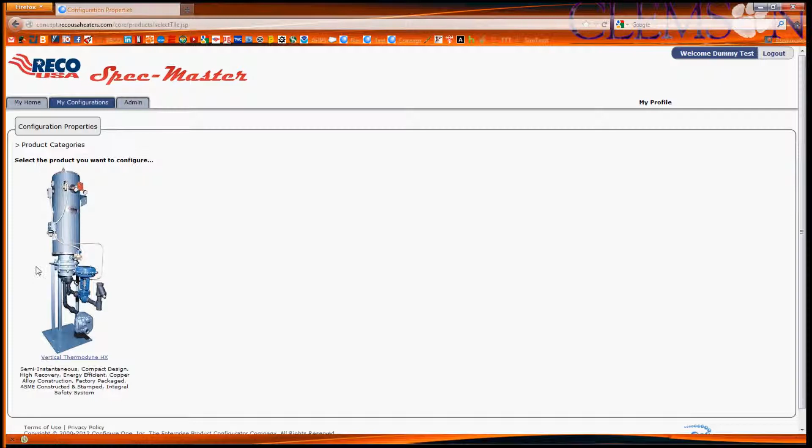Anyway, you'll click whatever product you want to configure, give it a job name. I just did demonstration test, so we'll just call this demonstration. Click continue, and you'll come to the first page. This is our terms of use page.

To protect ourselves, we've got this to where you have to agree each time, and if you need to see the full text terms of use, you can click this button here. It'll pop up in another window, and of course you can read through this. Anyway, agree and continue, and this page is where you'll begin to put your constraints in and start the design of your new unit.

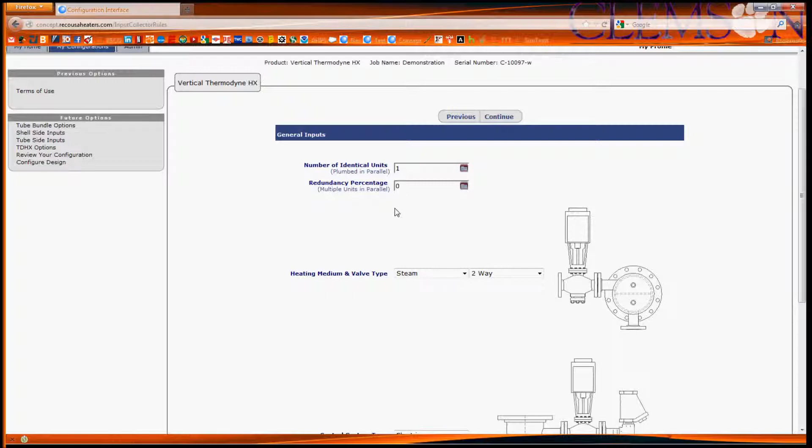So for the HX, we sometimes build multiple units for people depending on demand and how they're set up, but anyway, I'm sure y'all know that. You can do multiple units here, 1, 2, 3, 7, and then your percentage of redundancy here, and that'll be used in the calculation and then the sizing of your units.

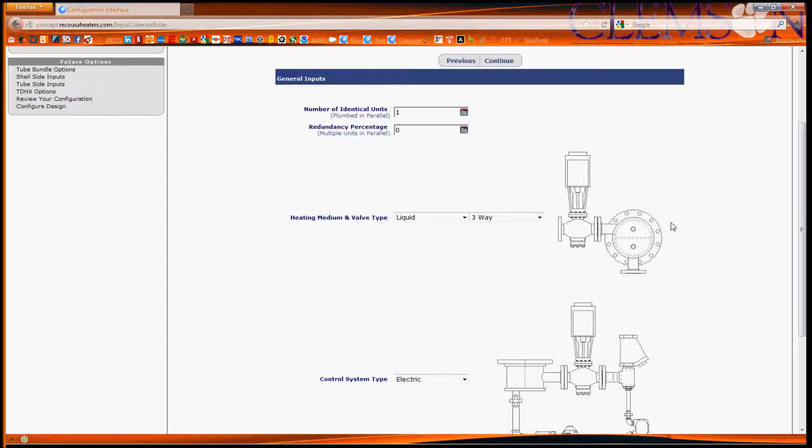Here you've got steam or liquid as far as your heating medium, 2 or 3 way. We've set this up to where you pretty much can't go wrong. For steam, you're only allowed to have 2 way. For liquid, you have 2 options, 2 and 3 way, as well as a picture change to the right, where when 3 way is selected, you get a 3 way picture. So we'll go back to steam, it'll automatically go back to 2 way.

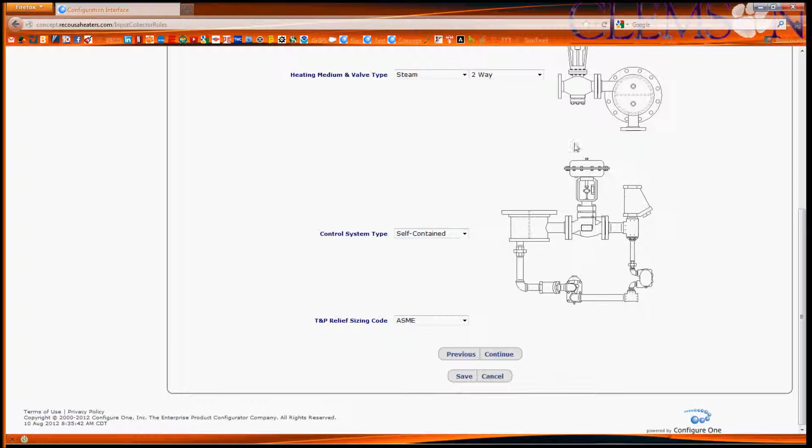For your control system type, you can select electric, pneumatic, self-contained, or none. If you do not want us to supply that, you can of course select none. And again, the picture change you'll see on the right here, for pneumatic, for self-contained, back to electric. Here you can select what relief sizing code you prefer, pretty straightforward. So we'll continue here.

This is the page you'll set up your tube bundle, single or double wall. Again, we have automatic changes here that kind of picks things for you, whereas single wall you have choices, for double wall you do not. And we do this throughout the program to drive you to select the right thing, or to disallow you from selecting the wrong thing.

I'm going to leave this as is. Again, 2-pass is the only option you have for steam, of course, since we selected steam earlier. If you select liquid, you'll have 2, 4, and 6-pass options there. So we'll continue.

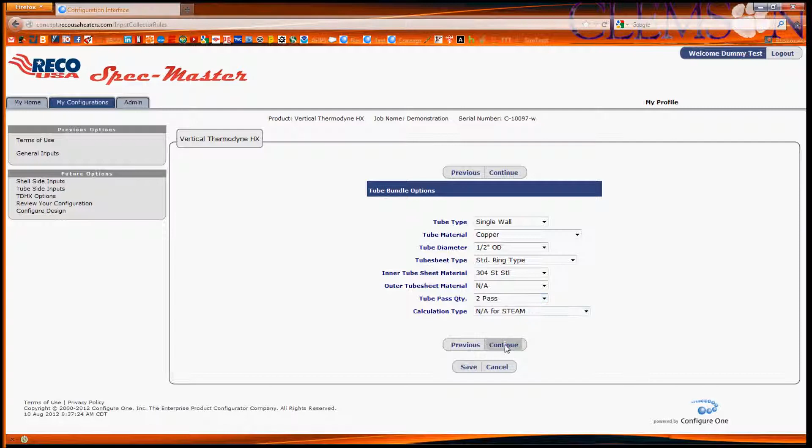This is where you'll start the nitty-gritty constraints for your unit. So we'll say 50 GPM. For these, whenever selections pop up at the bottom here, you'll either have to click to accept it, or you can just hit enter and it'll also select it and keep it.

If you don't do that, it'll drop it out and the page won't let you continue. So we'll leave it 40 to 140. Shell side, or the shell design pressure, you can pick. Fouling factor is important.

This will affect the size of your unit and will also affect the ability of the unit to meet demand. So I urge you to use the correct fouling factor, if any, here. Shell material you can also choose.

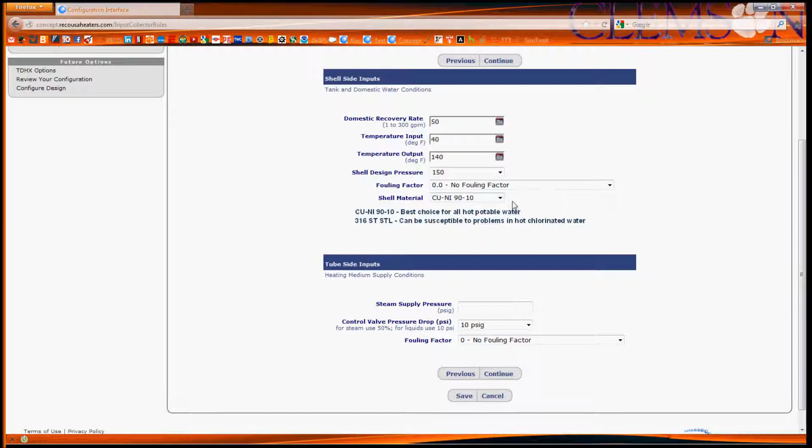So we'll move on to the tube side inputs. Supply pressure for steam will do 15 psi. This is not one of the drop down boxes, so you can just type 15 in it and move on. Pressure drop, I've got a little rule of thumb here. So for 15, I'm going to choose 8 psi for the pressure drop.

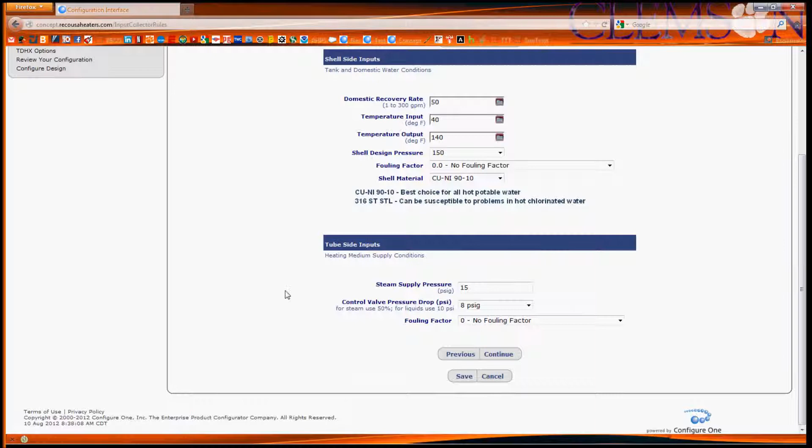And again, I didn't use a fouling factor here because this is not an actual job. So I've got messages that pop up. There will be messages throughout the program that drive you one way or the other. Sometimes they're error messages, sometimes they're just warnings, and sometimes they're just messages like this that give you an idea of what the program's doing, so you're not just sitting there thinking nothing's happening.

Here you can select your options, status light, seismic. You can choose the seismic code, limit system, vacuums, all this stuff, some of your BMS controls and relays. So I'm not going to choose anything here. You can click continue here.

As the message before said, our in-house sizing program is calculating the size of the unit and sizing the pipes, the shell, the bundle, all of that. And all the heat transfer calculations are going on in the background. This usually takes 15 or so seconds.

So here is where you can review. This will give you the size of your unit. This is a HX vertical. HXV is vertical. It's 150 psi design. It's a 10 by 24 bundle.

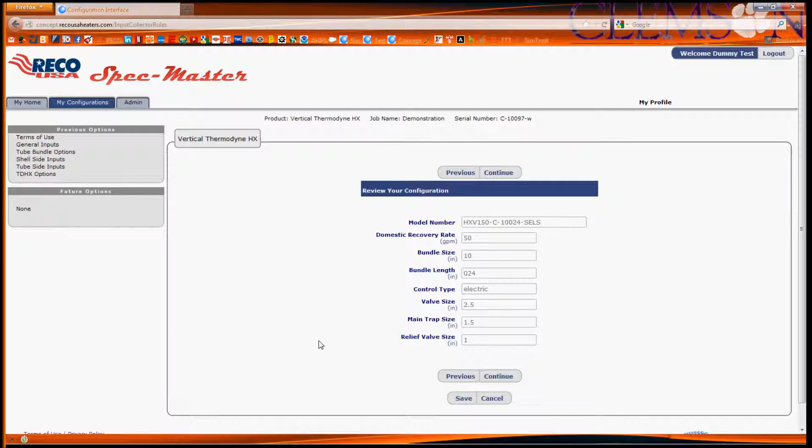And this is where you're ready for configuration. So I'm going to click configure design, and this is where all of the background modeling and drawing and spec generation goes on. So click configure.

Now everything on our servers is working. Configuration is now being built. In a few minutes you'll have an opportunity to review your stuff. Here, you can click Notify Me. If you click Notify Me here, like I just did, our program will send you an email when it's done, so you're not just sitting there twiddling your thumbs.

It's a really nice functionality. You can go on about your business, so you don't feel like you're just watching it. Typically, the run times we're seeing is 5 to 7 minutes on this, but if you're just sitting there watching the screen, it can seem like much longer.

So anyway, now I'm going to show you what's going on in the background.

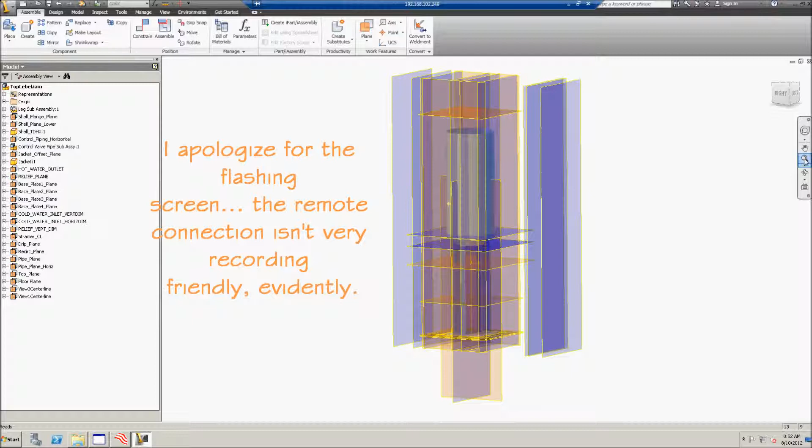Alright guys, I'm going to show y'all what's going on in the background. So this is actually a remote desktop connection to our server. This is where Inventor will run. So basically I just built the demonstration unit that we walked through together, and this is what happens right after you click configure.

So right now the Spec-Master software is sending all the information to the server. This model is already opened and it's reading all of your constraints. It'll begin building in just a second. So this is what's going on in the background when you're waiting for those 5, 6, 7 minutes for your outputs. And again, later I'll show you what everything looks like on the results page.

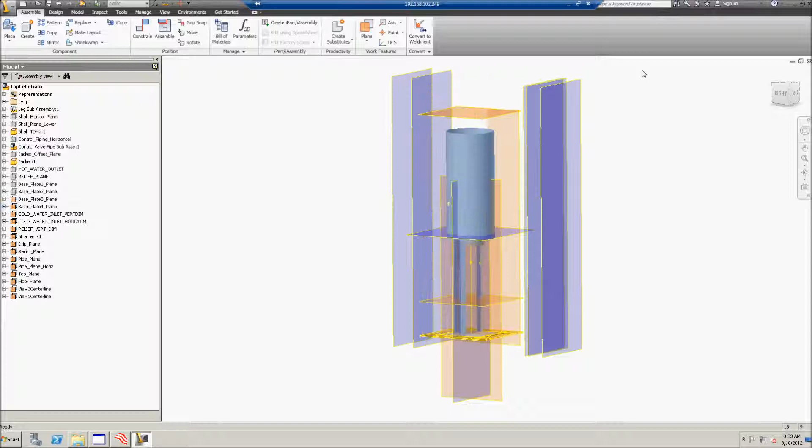So now it begins doing its thing. You'll see it begin to resize, and sometimes the bundle will lengthen, the jacket will get bigger, whatever's required.

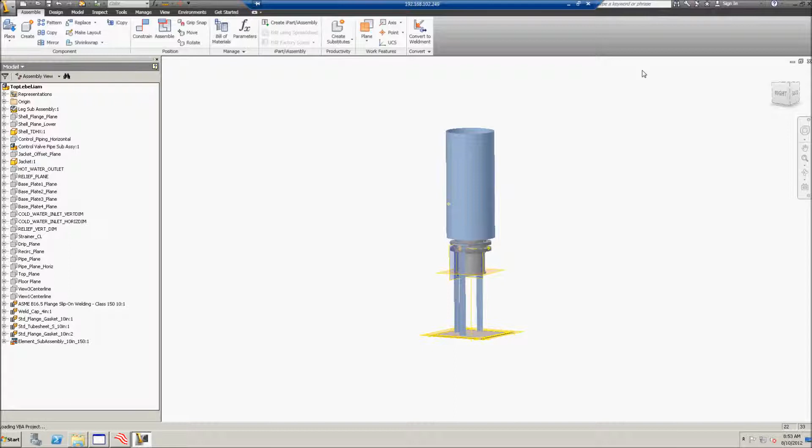So you can see it's placing parts now, and this is what makes this product so cool: every single design is custom. This is not a library full of drawings, this is not just one model that gets updated. This is a custom model every single time based on your constraints, and this is something that nobody in our industry is doing. This is something we're very, very proud of.

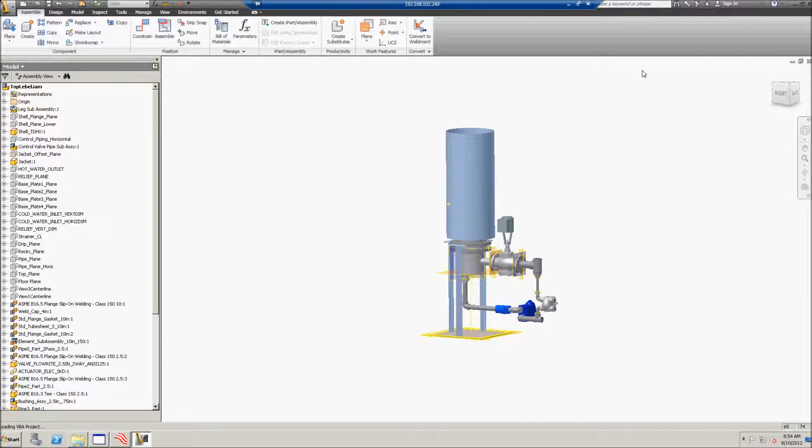So you'll see this part of the process doesn't take very long. But what we need this model for is a three-dimensional model that's created, and then views are taken off of this model and a drawing is made. So it's a very detailed drawing, a perfectly scaled drawing. Everything's just right because of the 3D model.

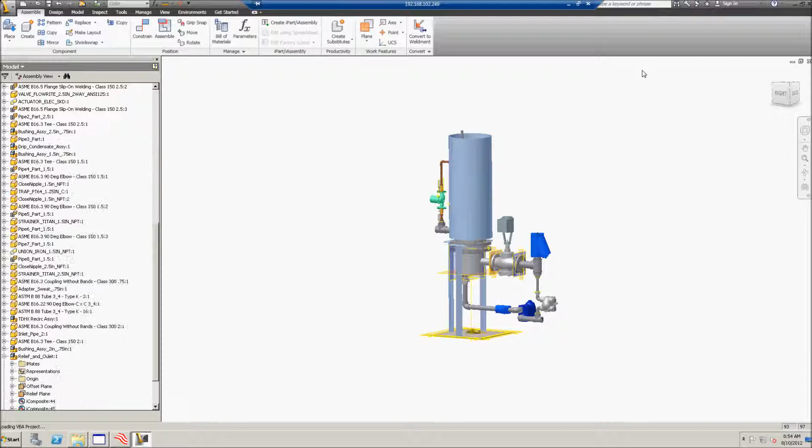The 3D model also allows us to give you more functionality in your business with the actual Inventor models, or we have the ability to create Revit models, which is something that we're seeing a big surge in our business with. So anyway, this model's done. It's gonna turn off all these planes, and then it's going to pass the views to the drawing, and you'll see it open up in just a second.

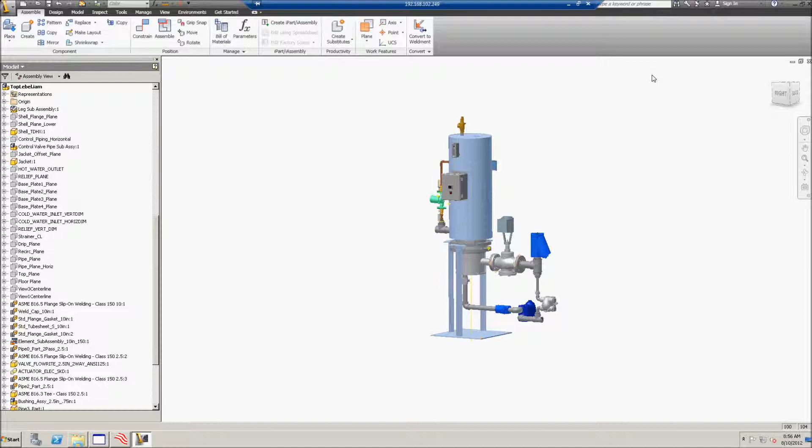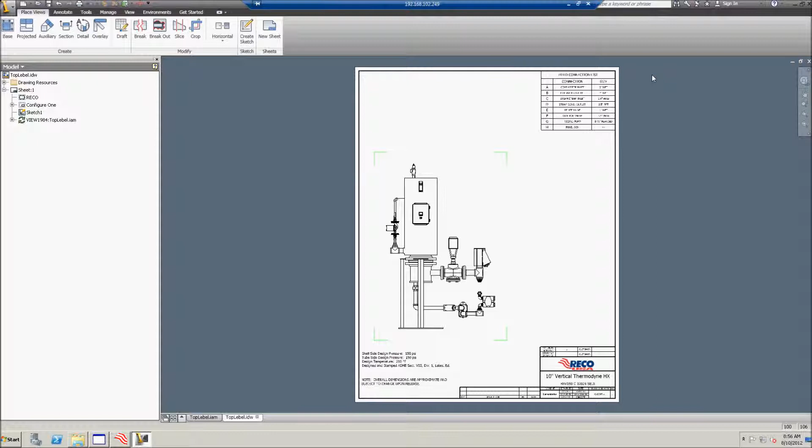Alright, so now we've got our drawings getting started. It's going to place 3 views, pretty much a front, a top, and a side view. This is a very, very memory intense operation to automate, so this is where the majority of the time it takes to get your results is eaten up. It's going to place 3 views and scale them to where they fit on the page.

And once that calculation, that process is done, the dimensions and callouts and all that will be placed. It's probably pretty hard to see on this screen, just because this is a remote desktop connection, but this is your field connection list, and I'll go through this again in the results page. But all of this text is live, so based on the inputs and based on the sizing calculations, this is automatically populated.

You can also see down here, this is a 10-inch unit, it's a Vertical HX, and right below it you've got a model number. This is something we use in-house, that just tells us what the unit is. Again, this text down here is live. Depending on your inputs, these will change for shell design pressure and tube side design pressure.

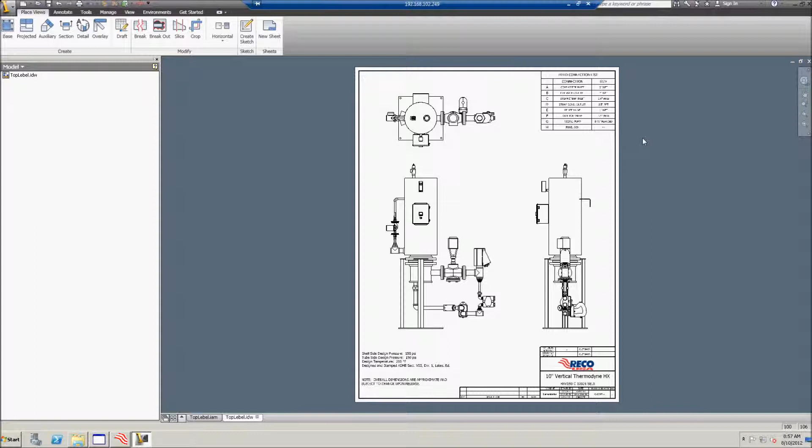Anyway, that's really about it here until it starts to place the dimensions, which it's about to do, it looks like. Yep, here we go. So everything's been scaled, center line's placed. These are your callouts, and all of these letters are what you'll find up here in the field connection list. So that process should be complete, and we'll move on to dimensions. There we go.

So again, these dimensions, nothing is calculated - this is actually measuring from one surface to another. And I've got it built in to where once the dimensions are placed, everything is placed in the center. So it's a very clean looking drawing when you get done.

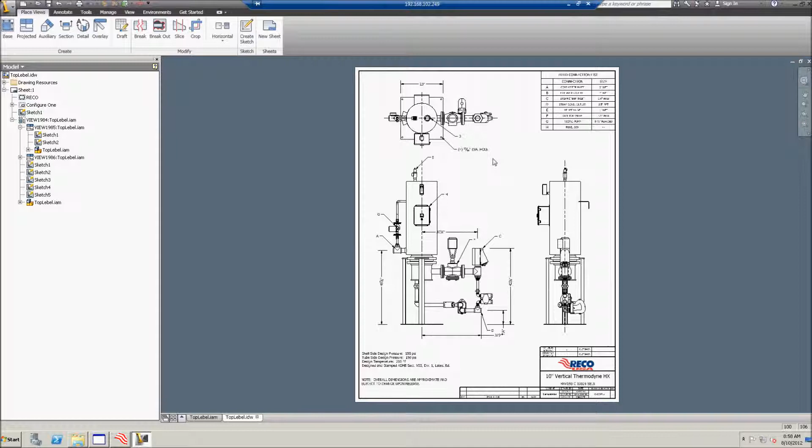So it's going to go view by view - this view gets dimensioned first, then I think the top view, and then the side view. There we go, so we're seeing some dimensions on the top view. Alright, that one's completed. It's going to move to the side view.

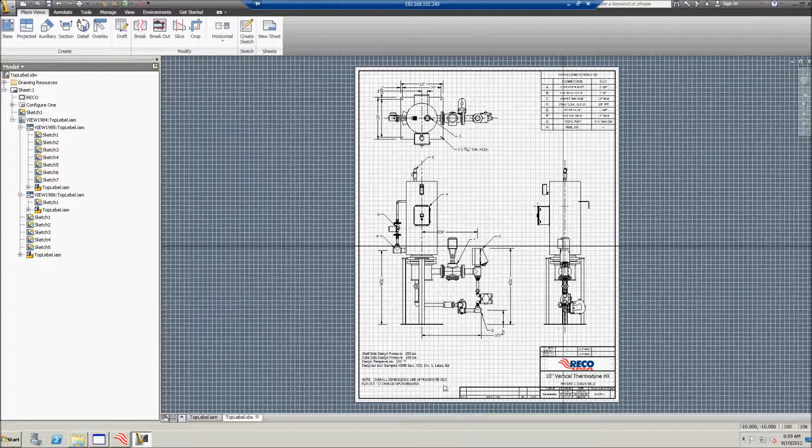But basically this will act as your submittal print, and this is something that you're going to get in 5 minutes. It's not something you're going to have to schedule time for us to have engineering time. This is making you a little more self-sufficient with very little input, and the time savings is extreme. So something I'm very proud of.

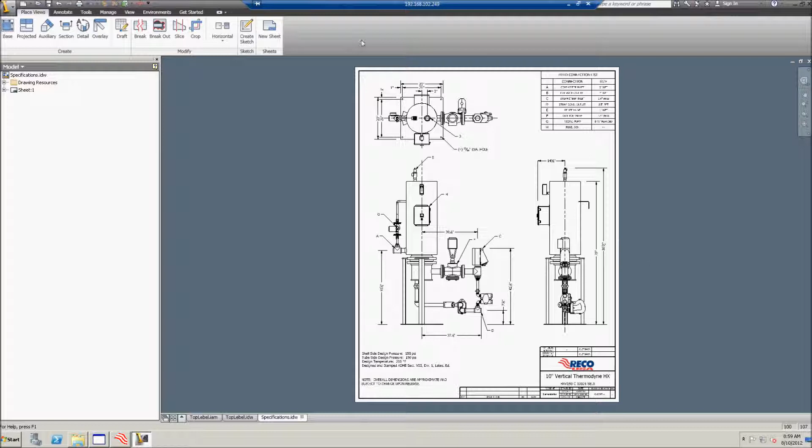So this is passing a PDF to your results page. Now it opens up the spec sheet. Again, all of this text is live, and it updates based on the calculations and inputs.

You can read here, this is all correct. We input 15 psi, and this is calculated - how many pounds per hour of steam is required. 40 to 140, we told it that. We've got some stuff in here to give you an idea why it's sized the way it is.

There's industry standards, and we also have our own standards that we follow for safety or for just a better design. So here, furnish and install one factory package RECO HX. Gives you the model number, tells you what everything's made out of, and down here you'll get - control valve is this size, main trap is this size, your drip trap's this size, and everything's spelled out.

Boom, boom, boom. Down here the empty bullets, those are for your other options that you can select. We didn't select any, so they're not here. The standard leg supports - this would be replaced with whatever seismic code you selected, if you select any. Of course we didn't, we just did standard. But this is a great, quick spec sheet

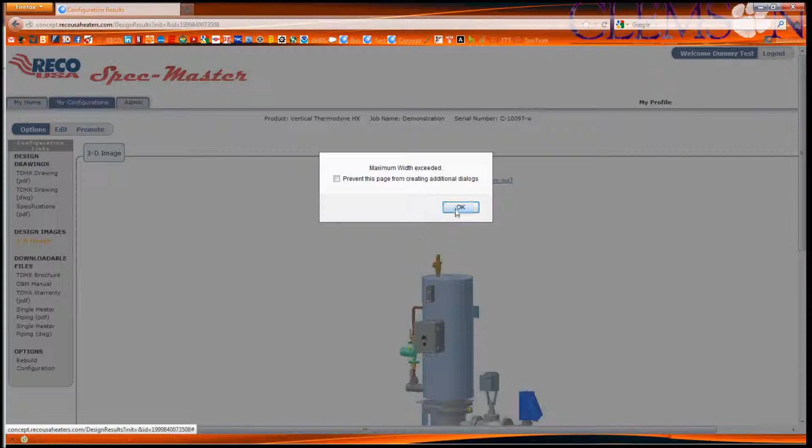and if you hit this, all you have to do is hover over these, and you can see maximum width is exceeded. So if you hover over, zoom out, it'll zoom out a little bit. But it gives you a 3D image. This is another quick visual check.

You see you've got an electric actuator here, and you were like, wait a minute, I thought it was supposed to be pneumatic. You may see that right off, and all you have to do is come up here and you can click edit, go back, change whatever you need to change, and boom.

So what we'll do first, you get a PDF drawing, you get a downloadable DWG, so it's something you can actually pull the scaled drawing out of a DWG and put it in your plans or whatever you need it for. So that's available. You have a specification. Of course, we're viewing the 3D image now.

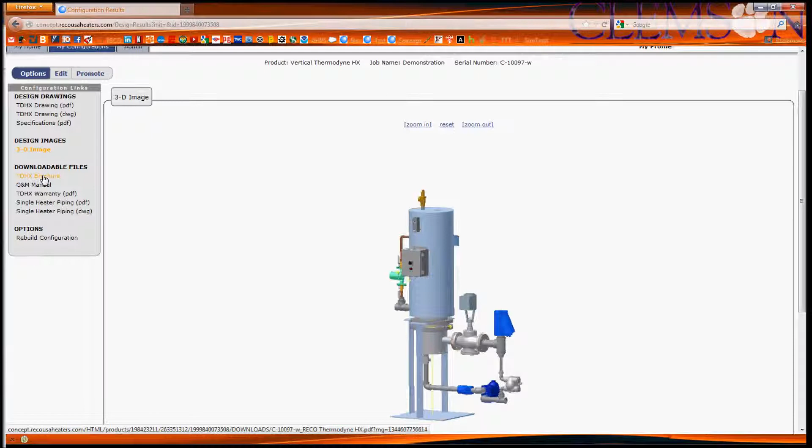The brochure that we have, I'm sure y'all have copies of, is here in PDF form. This O&M manual is just a generic O&M manual that we've got uploaded.

We've got warranty information, and the piping schematics are also live links. So this is a single heater, so the single heater piping comes up in both DWG and PDF format. If we selected multiple heaters, those drawings would pop up here, and you'd be able to print those out.

So pretty much any configuration you're going to have, the correct piping schematic will be here. If something doesn't show up correctly and you get an error on this screen, the first thing I would try is to click this rebuild configuration. If you still have an issue, please let me know as soon as possible so we can get it ironed out. You shouldn't see any issues, but I'm not going to say that you won't. This is new to us, and we're learning together a little bit. It's been tested pretty extensively, and we haven't seen anything in a long time, so you shouldn't see any problems.

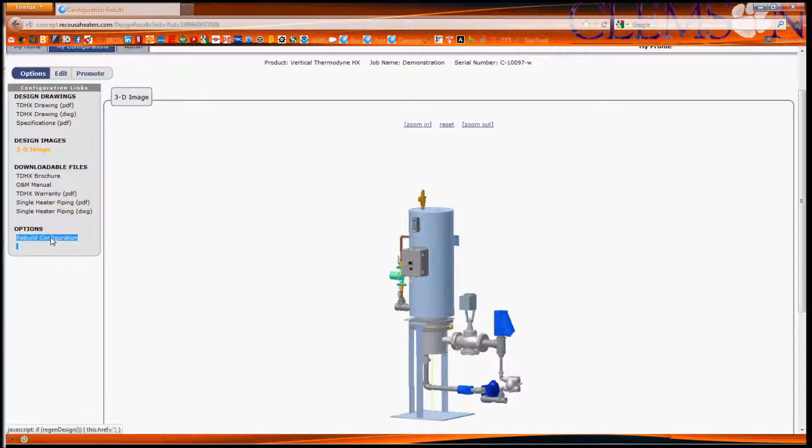But again, you can rebuild it here. So we'll start with the drawing, in PDF format, and it takes a second to download. There you go - I don't know why the view is blue there. There we go.

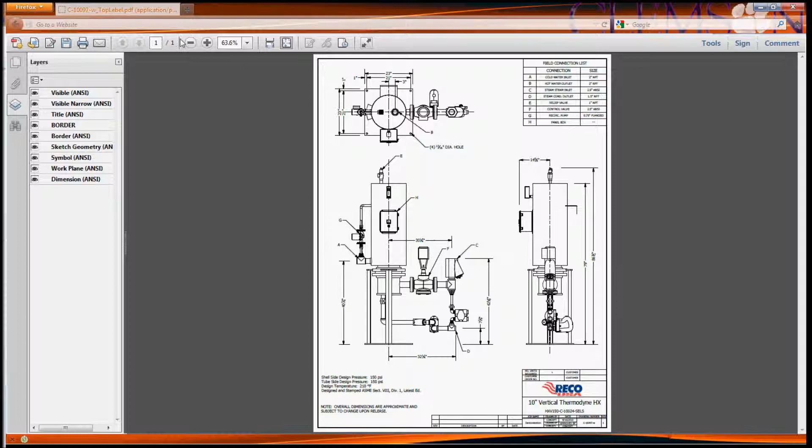But again, this is your drawing. You can print this out from here. Let's zoom in a little bit so you can see your dimensions are nice, clean and crisp. Everything is, like I said before, measured from one surface to another, so it's correct. This gives you something that you can give to your plumbing guys - they can stub out stuff.

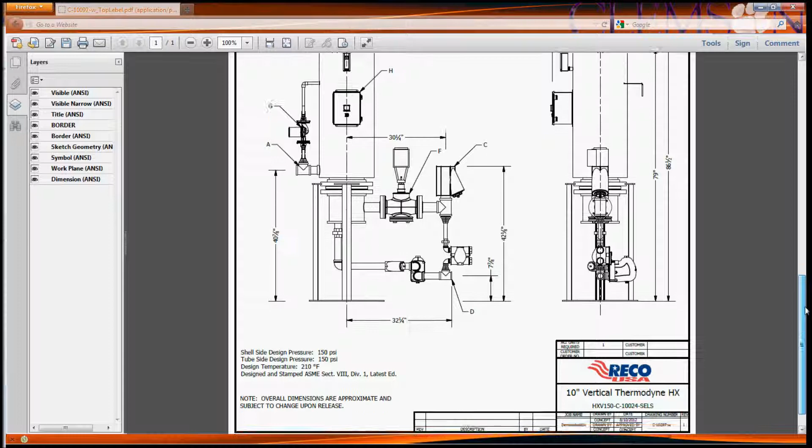If you ask me, it's pretty slick. Here you can see this is a serial number at the bottom of the page - we'll zoom in a little more. There it is. This is something we use to track jobs in our software. You'll see this number here as well, and of course you can see the job name and the product.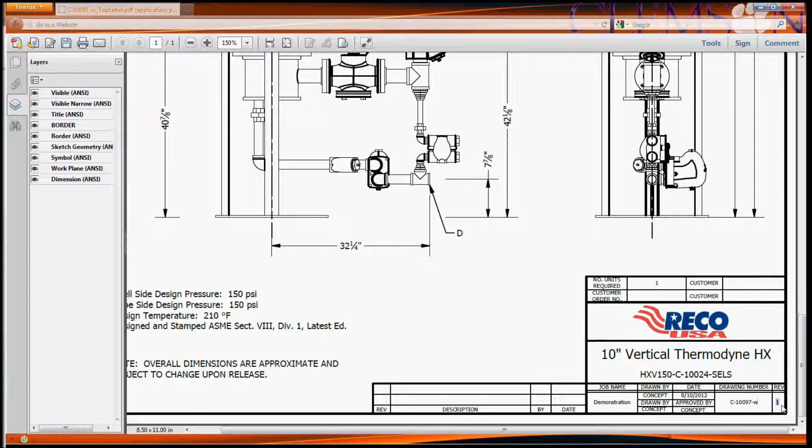We'll go back to the drawing real quick. It gives you a date when it was drawn, and it gives you the rev number. Now, if you click this rebuild configuration, that rev number is going to go up to 2, and so on and on. So anytime you make an edit, that rev number is going to change, and that's based on the model build rev. So it'll keep up with that for you.

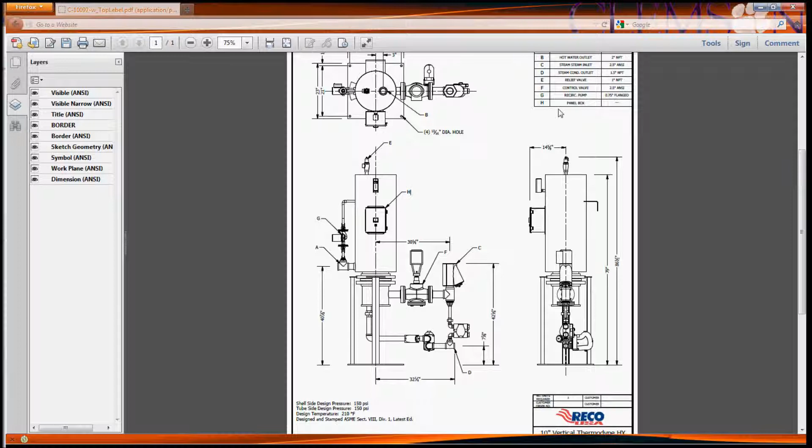Other than that, I think this is pretty self-explanatory. The field connection list up here gives you the connection size and type, and the callouts are here. So H is your panel box, C is your steam inlet - again, this is a steam unit, so it's a steam inlet. That text will change depending on what your heating medium is. B is your hot water outlet. I mean, it's pretty slick.

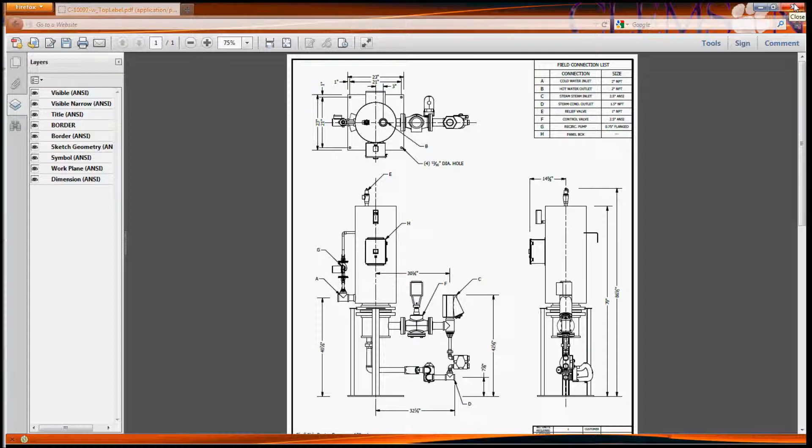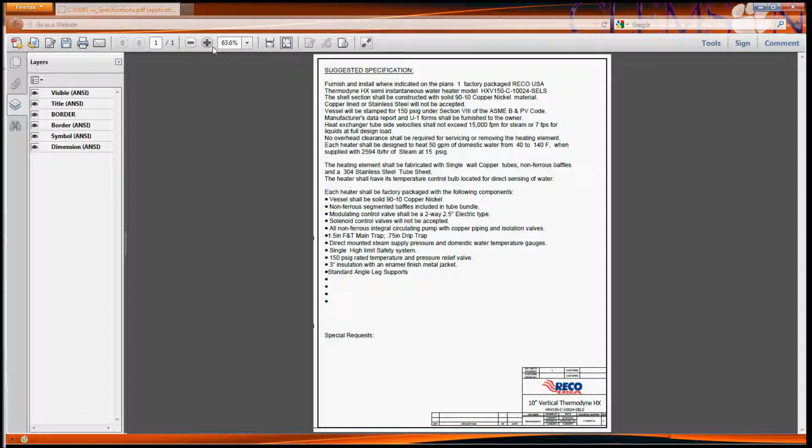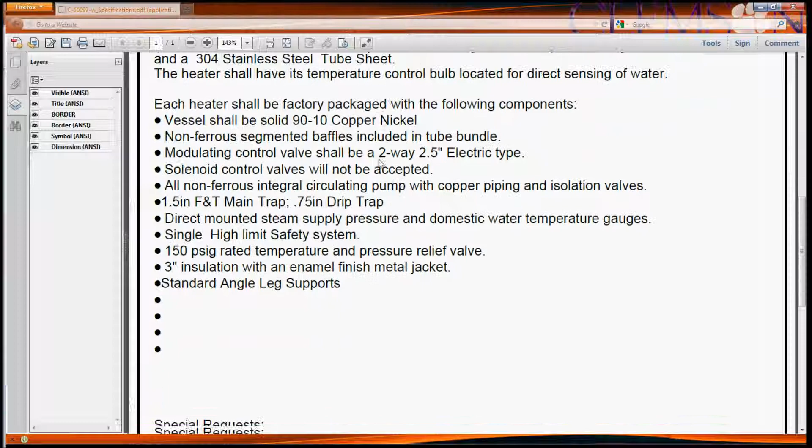So we'll take a look at the spec sheet now. I'm working with two screens, so I had to pull this stuff over. But I kind of explained this earlier - same deal. Everything is outlined word for word with live text. If you would like to see more in this, let me know - we can certainly get that added. If you'd like to see it formatted a little different, also let me know. We'll see what we can do.

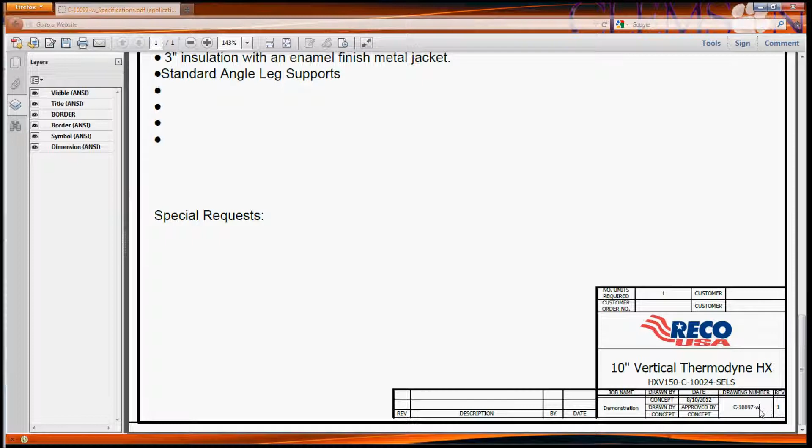Again, down here the rev number will change with the drawing, so everything's tied together. There's your serial number, model number - everything you need to know is right here. So you can print those, or use the DWG - if you click this, you can download it, save it, and open it in AutoCAD. Use it in your plan drawings.

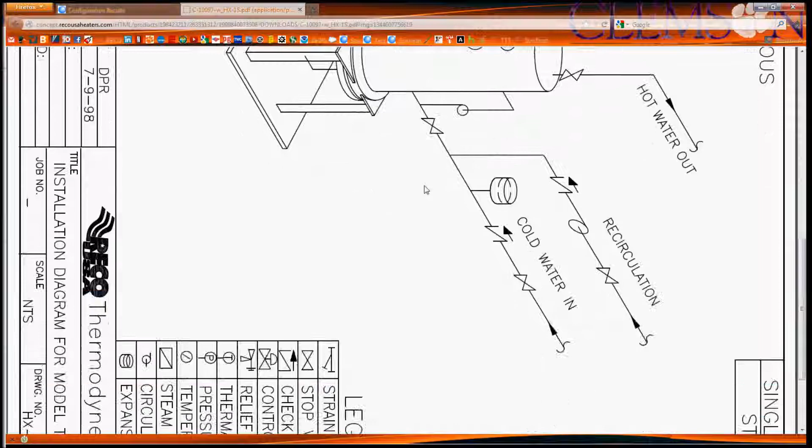Show you the piping schematic - I know it's sideways, sorry about that. But anyway, everything you need right here at your fingertips in just a few minutes, which is pretty awesome.